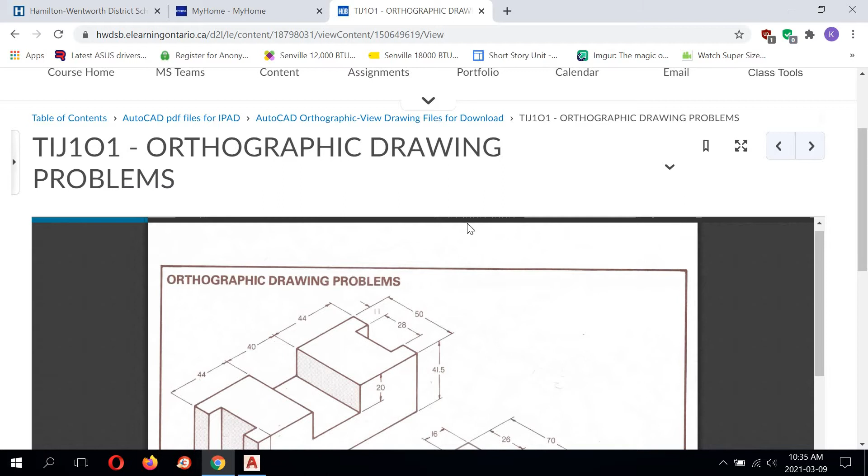So we've learned how to draw the control bearing. Now we're going to take a look at how to draw the counterweight. Very similar to the control bearing, just a little more complicated. But all of the knowledge and skills we've learned so far are going to be used in the creation of this drawing. So like before, we're creating a top, front, and right side view.

A view looking down from the top, a view looking at it from the front, and a view looking at it from the right side.

This left side of the counterweight is not extremely clear to us, so we have to take a look at it and examine it before we begin. I can see that there is a slot here, an empty space, and it looks like it runs all the way from the front all the way to the back through the width. I can see here that it looks like it passes through by examining this area right here. So that's a clue that lets me know, okay, I'm going to be making that space totally open.

The next thing is there's a slot sitting right on top, and it's not very clear how deep it goes. If it just stops at the top of this flange, it's not clear at all. So what we're going to do is assume that space passes all the way through from the top, and goes all the way through to the bottom. So that's my interpretation of it, and that's how I want you to complete yours.

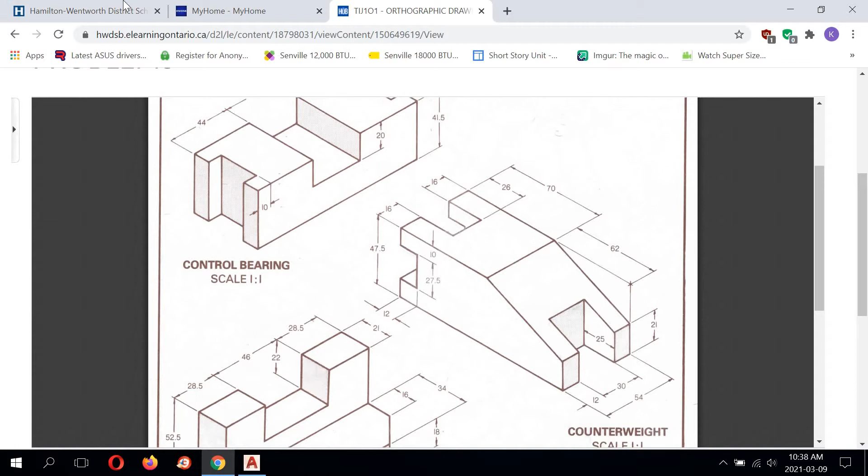With this arrow, and I'm going to click Counterweight DWG file. And we're going to download this and open it up. Okay, so here's the counterweight.

So as I've told you before, you have to go up to File, which is the big A, go to Save As, and then take these things out of Downloads. Well, these are just the empty downloads from previous, but you actually want to scroll to where you're saving these things.

Save it in a designated folder. So in my case, semester 2, my AutoCAD drawings, there are my first 4. I'm just going to take the 2 out of here because I downloaded a couple of times earlier, and I'm just going to call it Counterweight, hit save. Okay, so now I know my drawing isn't going to accidentally delete itself. I'm good to go and to begin.

As you've learned before, the first thing I should make sure of before I get started is that ortho is on. And if I look at my status bar here, it looks like ortho is on. It's shaded in blue, that light blue color, so that is already ready to go. And I'm going to start with the line command.

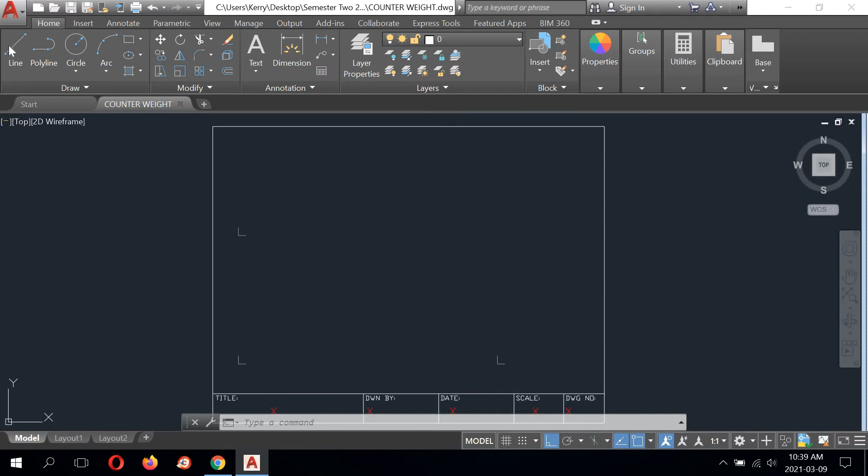And I'm going to start by drawing the front view. So I'm going to grab the line, zoom in with my wheel, left click this endpoint, and pull the mouse up and start keying in my distances. Well, I have to examine the drawing. So the drawing's telling me that I need to go 10 millimeters vertically to start. I need to come over

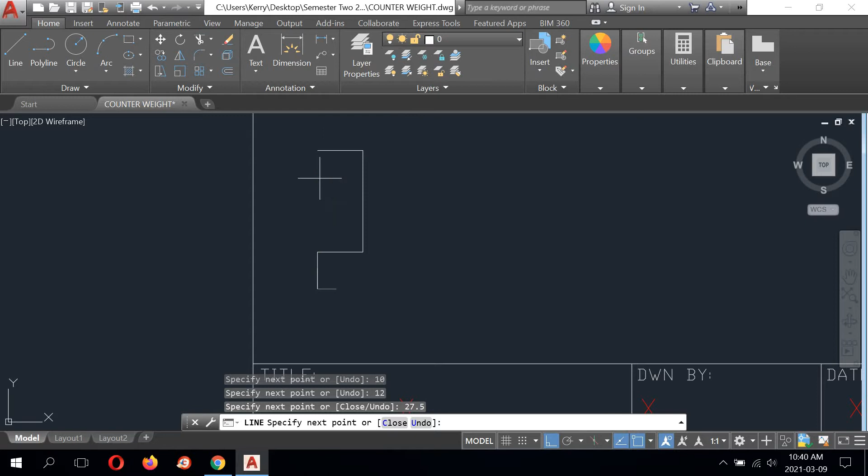12 millimeters. I'm just going to pan down a bit with my mouse. I'm going to come up. The next value listed is 27.5, enter. And I can touch this endpoint but not click, and create an O-track. So there's my 12 millimeters. Again, that's optional, I like to do that from time to time.

I'm going to be coming up again 10 millimeters, and this line is going to end at a distance of 70 according to my iPad image. So I'm going to type 70, enter. All right, at this stage, that's about all I can do, I feel, at this time in this particular area.

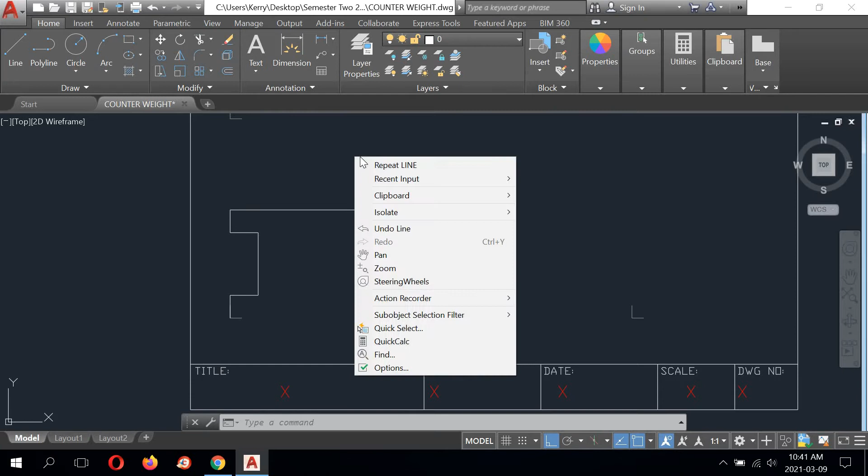So I'm going to right-click my mouse, left-click to end the command. I'm still going to continue on with the front view. Right-click, left-click, repeat line. Go back to my origin, start at the exact same endpoint I've already done, left-click.

Now I'm going to draw the total length of the counterweight. It doesn't give me an overall dimension, it gives me the value. I know the value of this line is 70, and then it tells me the rest of the length is 62, so I have to add those two numbers together to know my length. 70 plus 62 gives me 132.

So 132, enter. Now I'm going to come up vertically. The next value is 21. Now this is really easy, I don't need to key in a distance, I don't need to take ortho off, I don't need to turn on polar. I can just come up here, find that endpoint, and click, and that's going to create the line at the perfect length and the perfect angle I require.

And I can right-click, left-click, enter to end the command. Now again, why does that work? Because snapping with osnaps, such as endpoint, will override the ortho command and force a line on an angle, even if you have ortho mode on. So again, polar wasn't even used to create that line.

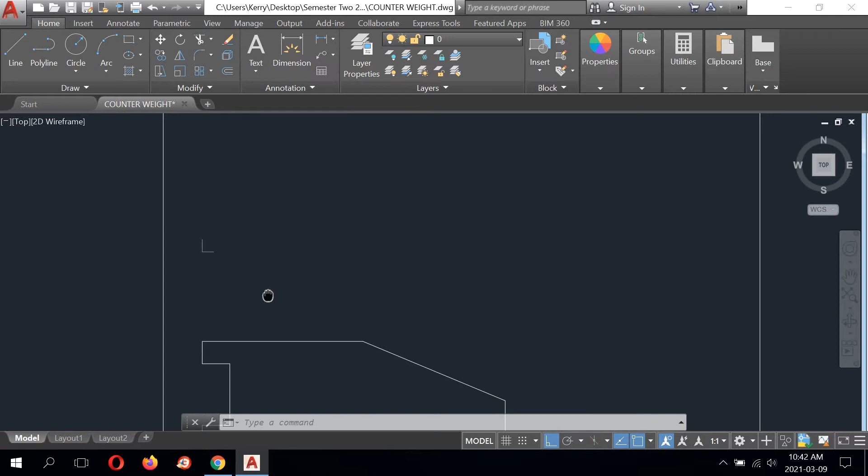Going to be right-clicking, left-clicking, repeat line. Go to the origin, find the endpoint, our usual starting position, and we're drawing a line vertically at 16. Hit enter, come over to the right, and the horizontal distance, according to the image, is 26. Coming up vertically, now it doesn't actually tell us the height of this line by looking at the image on the iPad.

So just to show what I'm talking about, I am going to reference this once more. And as I was talking about earlier, here's a 70, here's a 62, we had to add those numbers together. There is the 21 height.

Now we know that this is 16 millimeters long. We know that this line is 26 millimeters. We don't know how long this line is, but we know that this is also 16, and we know that the width is 54. So all I need to do is subtract 16 from 54 twice, and that math is going to give me the length of that line.

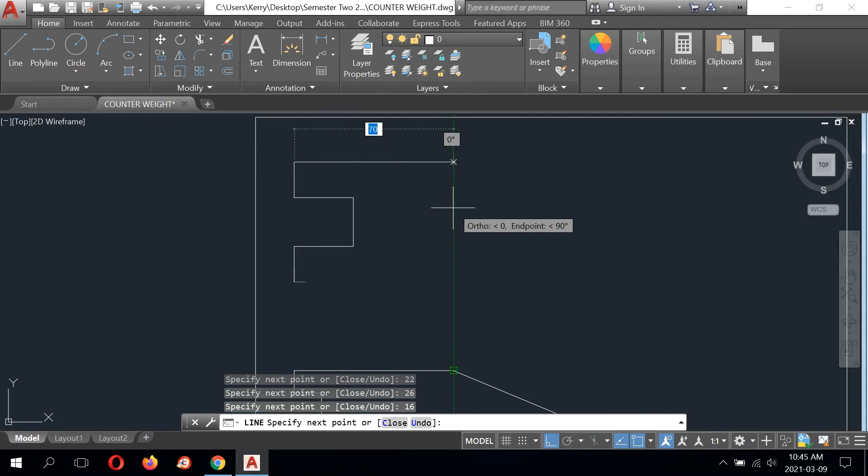I'm going to come down, touch this endpoint, and then create another O track for my 70, and then just type C, enter to close. And that's going to automatically exit me from the line command as well. So these are all the commands I'm using today, this is nothing new, all these commands you've been shown in previous drawings.

All right, so moving on, we need to complete the top view of the counterweight. But I don't want to start a line here at this endpoint and make a new one and track it to here, I want to keep all my lines essentially one line, I don't want to break them up into 2 or more.

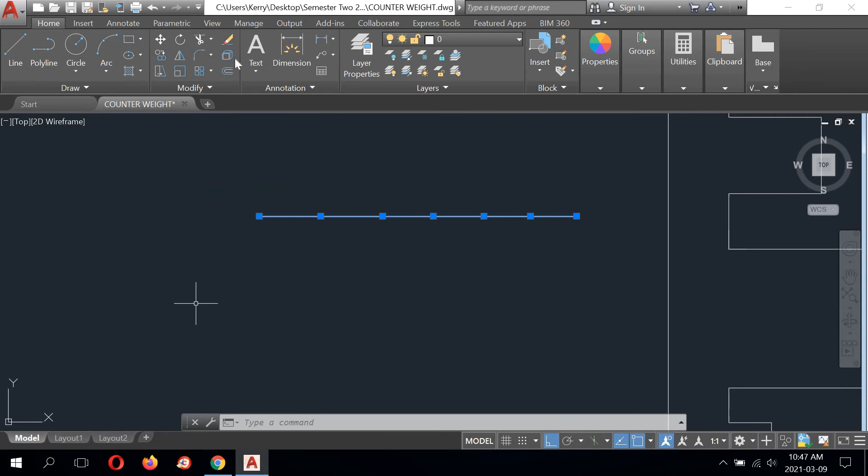And as you can see, if I flash my cursor on these, the whole line highlights, and this is better practice. This is the preferred way of doing things, to not have a bunch of lines all together. For example, if I draw a line here, doesn't matter how long it is, and then repeat a line here, and maybe again, that all looks like one continuous line. But if I flash my cursor over it, you can see 3 pieces of it highlight. This is not what I want, I'm just going to erase this because it's not needed.

Come back, and I'm going to select this line using a grip, left-click it at the node, and I'm going to pull it the rest of the way, which is 32, according to my sheet.

Actually, sorry, it was 62. My mistake, I'm going to do that again. Grip, type in 62. There. We're going to do the same thing below. 62.

And then I can grab a line and just start here, and continue to draw that counterweight. So looking at my sheet, this line should be 12, and it has to come back horizontally to the left. It shows a depth of 25.

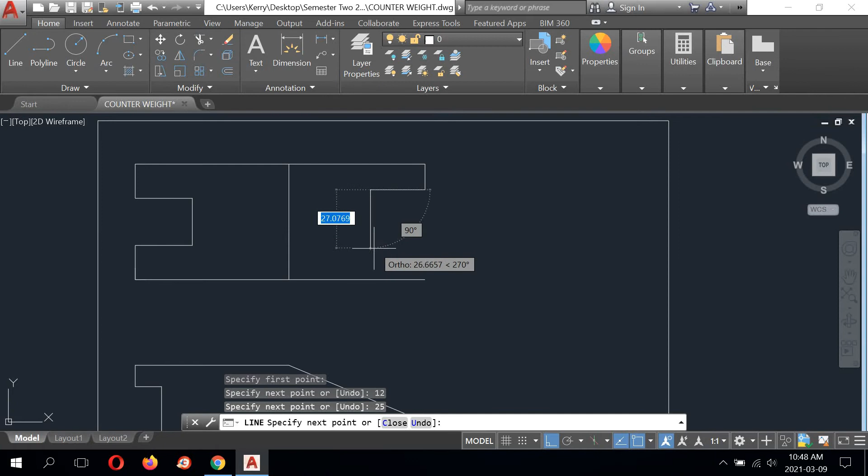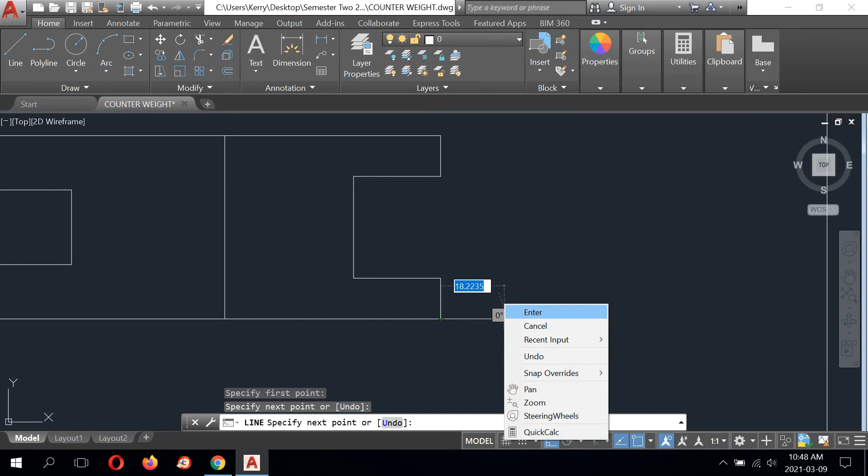Coming down vertically, the next value is 30. And then I'm going to type in 25, or track it. I track that one and then just come down here, C, enter to close. Okay, so the close didn't work, so I'm going to delete that. Just go back into my line and click endpoint to endpoint.

There, so that is how the top view looks. Of course, there's some hidden detail lines missing on that, which we're going to come to later.

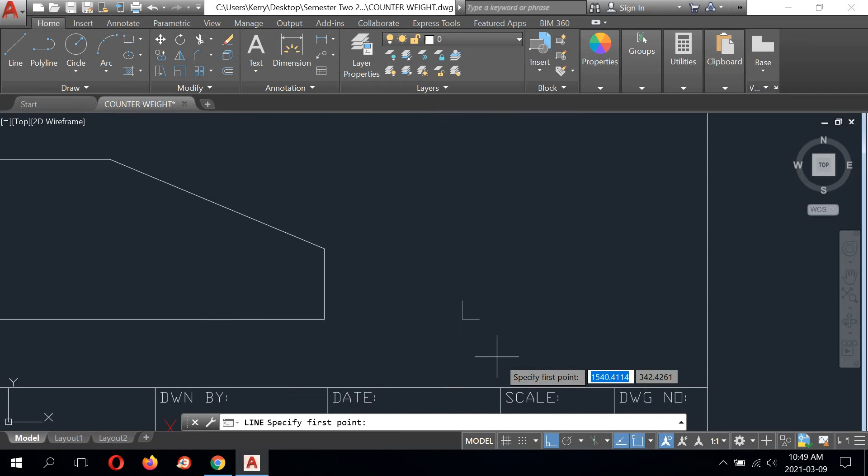So the last thing we have to do in terms of physical outline is the right side view. We know that if I look at the image, the height is 47.5, and we know that the width is 54. So let's grab our line tool, find the endpoint snap. Again, you could come up and track this - it says 47.5, so that proves that is correct.

Click, we're going to type 54, come down, O track, C enter to close.

All right, now there's more detail to be shown on this right side view, right? We have to be able to see this surface, and this surface. These three surfaces are seen clearly to the eye when we look at this on the right side.

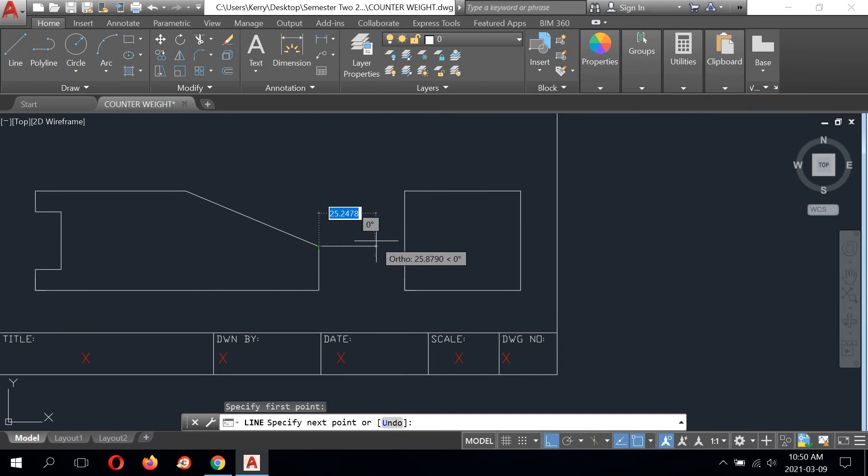So we can use information from this view to help us, right? I could take a line, snap it to this endpoint, pull it to the perpendicular snap on the edge of the right side view, and what I can do is now offset the width,

which is 12. So I can type 12, enter, select this line, click to the right, select this line, click to the left. Right click, left click, enter to end. And what I can do is trim off what I don't need, right?

So I can select the trim. I know that this is the boundary to trim this line off, so I'll select this line, right click my mouse, left click the line I want to trim away. Right click, left click, enter to end the command.

Right, I keep doing less and less on the keyboard. I try to use my mouse to do a lot of things because it just saves time and effort, right? It's something that when you get comfortable, you can do, but if you prefer to use more keyboard strokes or going up to the toolbars, that's totally fine too.

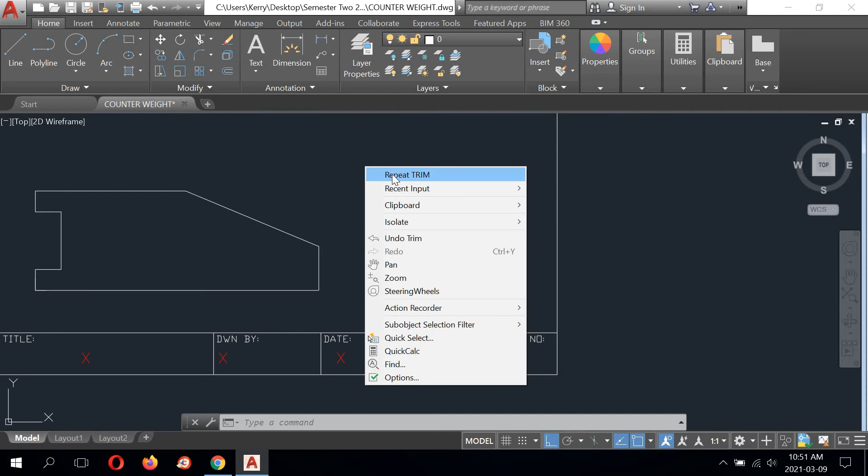So right click, left click, repeat trim. Going to be selecting this line as a boundary, right click my mouse to activate the trim, left click this line and this line. Again, right click, left click, enter to end the command.

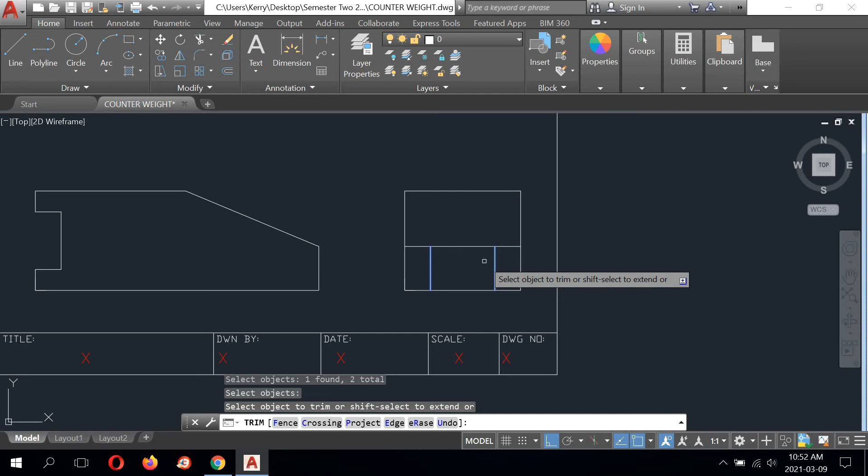One last line to trim, which is the middle part of this horizontal line. So this line and this line, the vertical two, are going to be the boundaries this time. So right click, left click, repeat trim. Select these two lines, right click your mouse to activate the command, and then left click what you want to trim away, which is right there.

So now we see these two surfaces here and here where they need to be. We have one more here, but we don't know how high it is, right? When I look at this drawing, it doesn't tell us the height. So that's going to be a bit of a problem for us, isn't it? But there's a way to figure it out very easily.

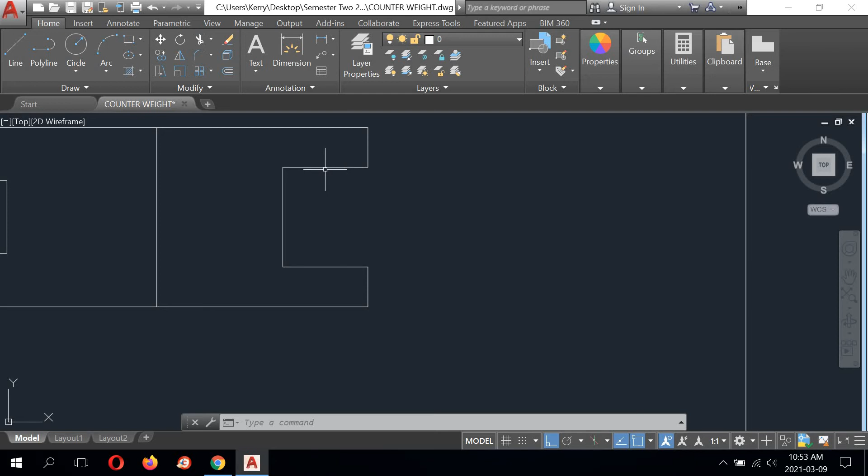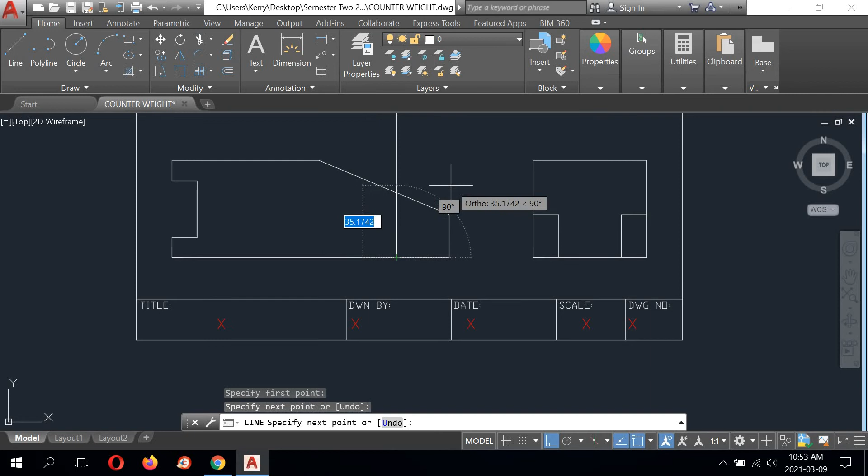We know that slot is 25 millimeters deep - it says it on the drawing. I can use a utility and measure it, and it tells us 25. So what we could do is grab our line, again, snap a line to this endpoint and pull a line down to the perpendicular snap, and trim off what we don't need, right?

So in this exercise, you're probably noticing we're using other views to help us complete views that we need to do, right? We don't have all the information given to us on this sheet here, so we're forced to use other views to help us. Let's grab the trim. This line is the boundary. Left click, right click my mouse, left click trim.

Now, this line here is going to be hidden. This is our first hidden line in this drawing. So we're going to select it, go up to our layer manager, and pick hidden from the list.

Okay, so now this is very simple. Again, we need to use this view to help us complete the right side view. So we're going to grab a line, snap this intersection, and drag a line over to perpendicular.

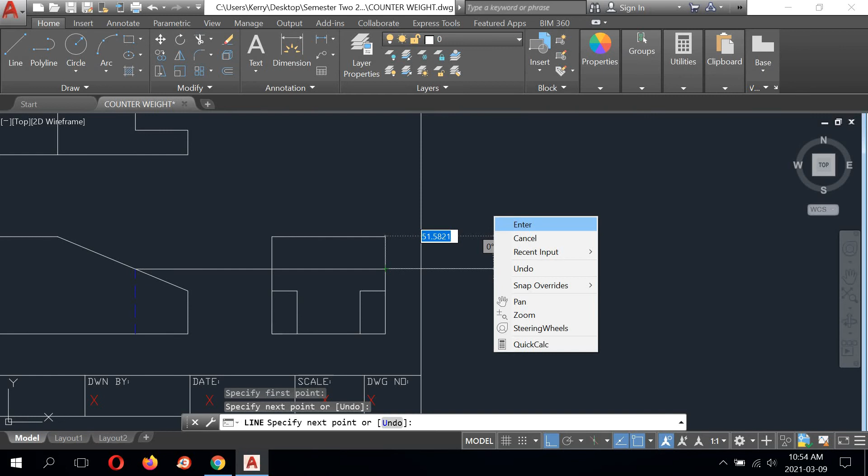So now we know where the height of this surface extends upward to, which is this line right here. We now know what that is. It's something that we could never have guessed, right? I'm going to measure it. 31.6855. Of course, nobody would have gotten that. It would be impossible to guess. This is the only way to find the height.

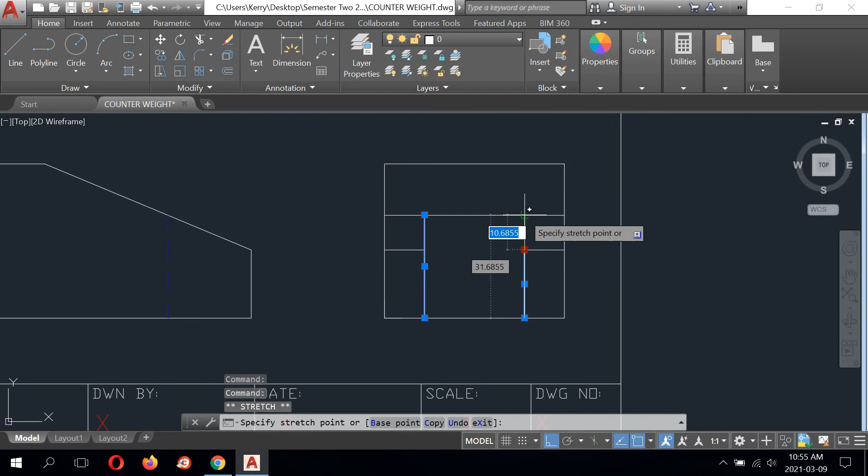So we've got more trimming to do. Trim. And what I can do here is take this line and use a grip, bring it up to this perpendicular snap, pick this line, grip it up to this perpendicular snap. You know, it's clunky for me to end commands not being able to use escape.

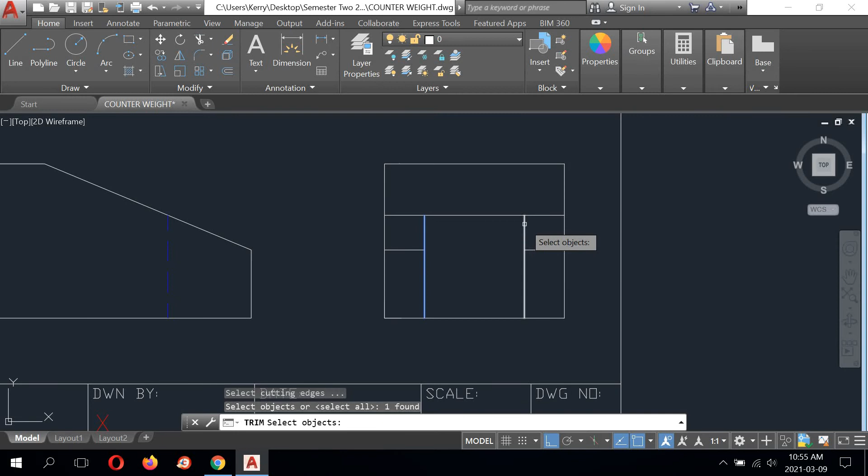And we're going to trim again. We're going to trim these lines. These are our boundaries. Right click, left click, and there we have it.

So that is what this looks like on the right side view, right? This surface here is the angular surface here, and then we see 1, 2, 3 flat vertical surfaces here.

But we're still not done. We have to complete all of the hidden detail lines that we still have not done yet. So this slot that passes through from top to bottom, its hollowed out section needs to be represented here on the front view, the same as what we've done here and here.

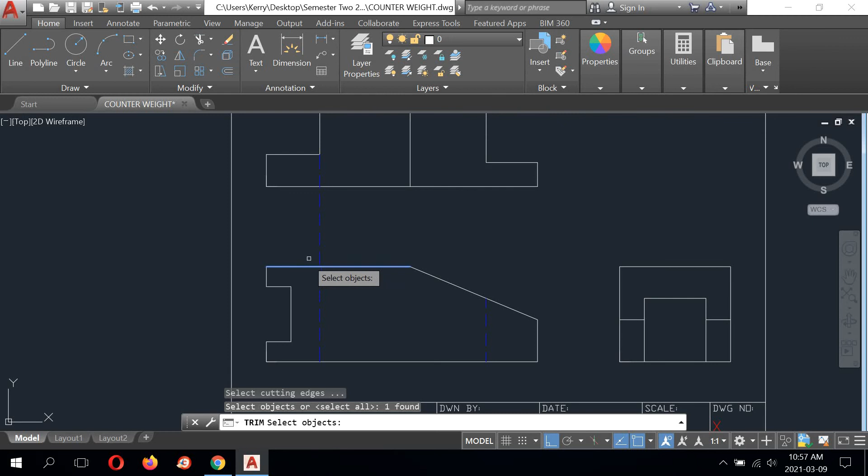Let's grab the line, click endpoint, and draw a line down to this perpendicular snap. Select it, make it hidden, and then trim. I'm going to commentate less and less on trim because I've done it so much in this video.

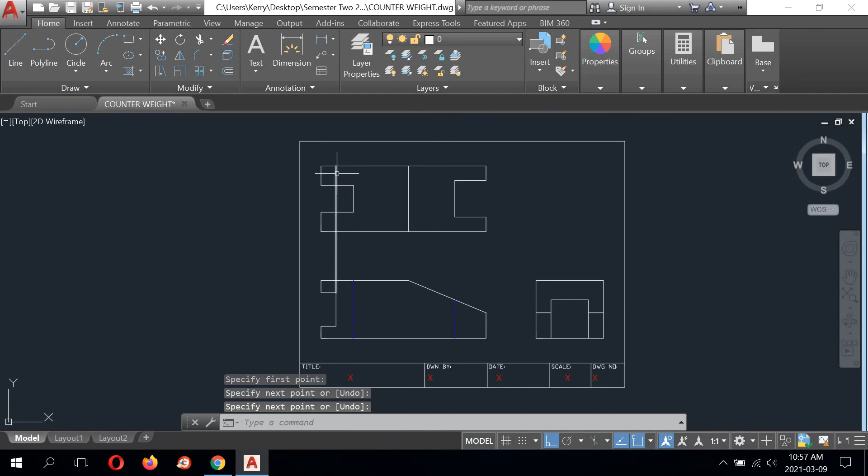So there are the hidden detail lines completed for the front view. We also have hidden lines that we have to show from the top view. We have to represent this slot, the opposite effect, and its hidden lines that project upward to the top view. So we'll select line, find this endpoint, and click all the way up to perpendicular, right click, left click, enter, select this line and select hidden.

And trim. And then we'll do that again. We'll right click, left click, trim, select this line and trim that one away.

And then we have the right side view to do. So how this works, I'm just going to refresh my iPad because my screen dimmed out on me. The only thing that we're going to notice in hidden detail for the right side view are the four corners in the rear, right? Which is right here, 1, 2, 3, and then the fourth, which you can't see in this image. And then there's dead space or hollowness passing through 2 slots.

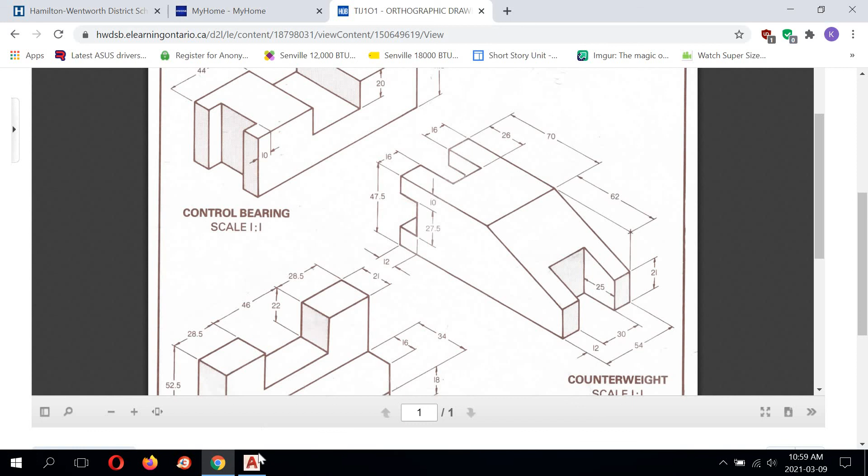This one can be a little tricky to understand. So we're going to grab the line. We're going to draw a line from this endpoint, come over to perpendicular, right click, left click, repeat line, do the same thing again. And we're going to make these hidden lines. And then trim them, to avoid confusion.

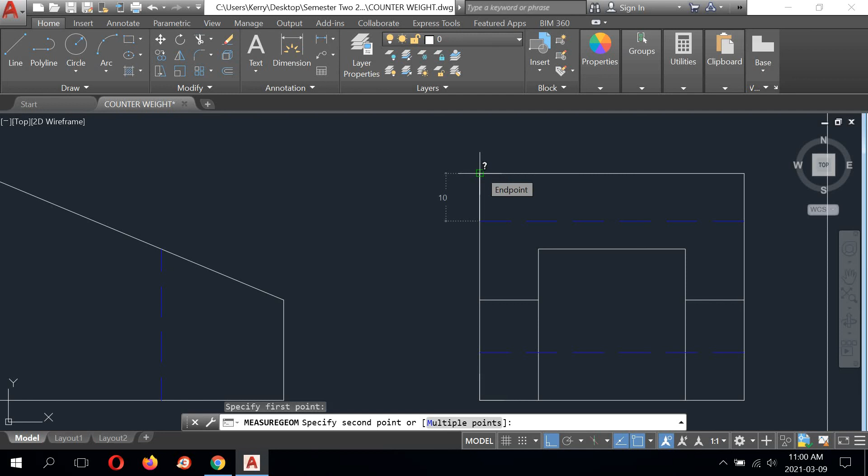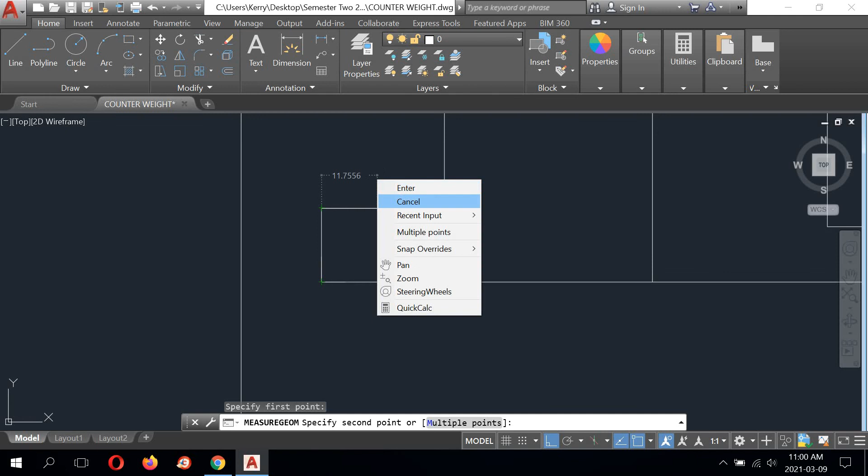Okay. Last thing. We know that this is 12 millimeters. No, sorry, 10 millimeters, my mistake. The same as what we would measure here. But we can't project anything over for the width. So we have to actually measure this, right? And we can measure it. It should say 16. All right, so we're going to come back over here.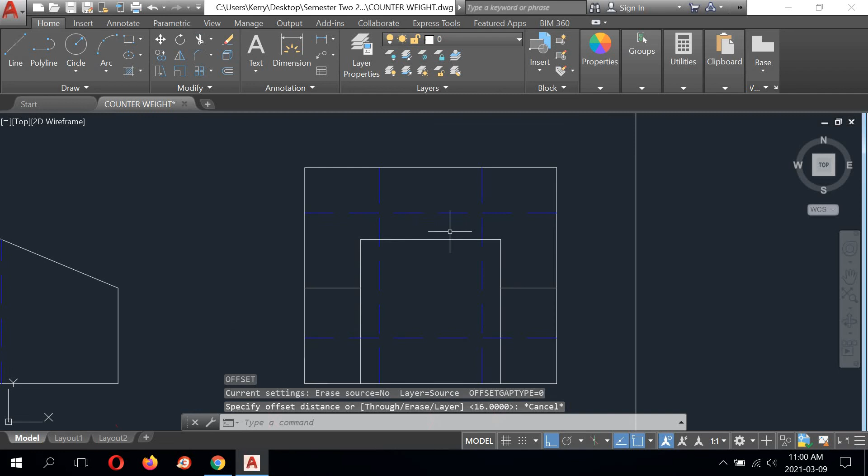Offset, we're going to key in 16 as our value. We're going to offset this line to the right, this line to the left. Select them. Make them hidden. And then the last thing we have to do with this is just trim what we don't need. And that's everything that sits outside of these 4 rectangles in all 4 corners.

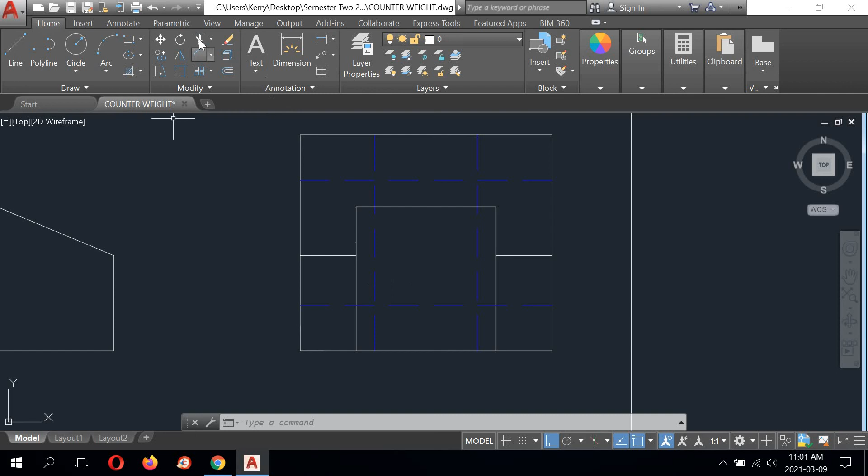Right? There can't be hidden lines passing through dead space. Right? If 2 slots are passing through one another vertically and horizontally, there's no hidden lines there because there's nothing there. It's just empty space. So we're going to trim. We can select these lines as our boundaries, right-click our mouse, and then start trimming what we don't want, which is here and here, and here, and here.

And that is it. That is the counterweight drawing, fully drawn, all 3 views orthographically with all the hidden detail lines.